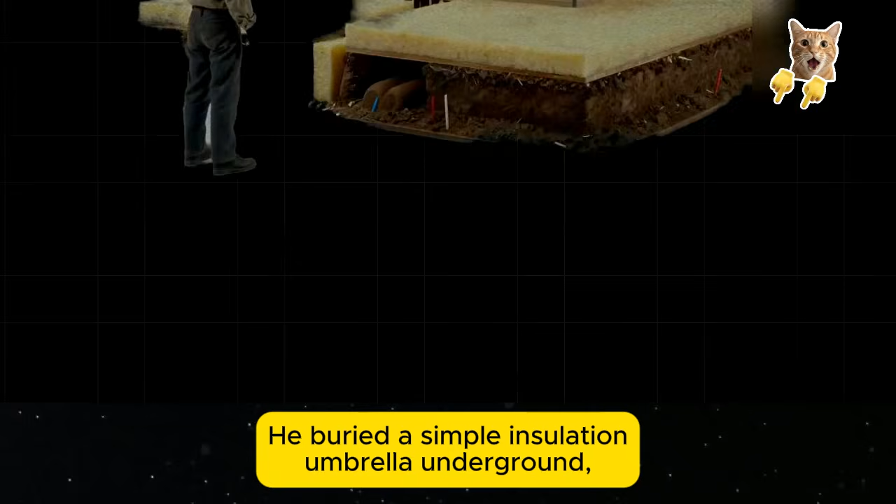In 1985, a physicist in Montana built a home that has not needed a furnace in nearly 40 years. No solar panels, no heat pump, and most importantly, no monthly energy bill. He buried a simple insulation umbrella underground, and the earth itself became his heater. It stored summer warmth and released it all winter long. The heating industry buried it even deeper. By the end of this story, you'll understand exactly how it works.

His name was John Hait, not a contractor, not an architect, but a physicist. He lived in Missoula, Montana, where winter temperatures regularly plunged to minus 30 degrees Celsius. While the rest of the construction world kept building the same insulated boxes and filling them with furnaces, Hait asked a question no one in the heating industry wanted to hear. Why are we burning fuel to heat air inside a structure when the largest thermal battery on the planet is sitting right beneath our feet?

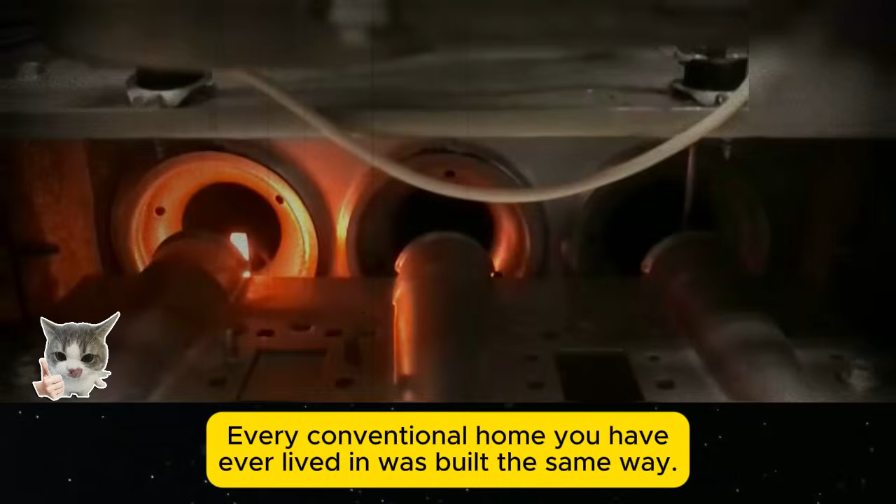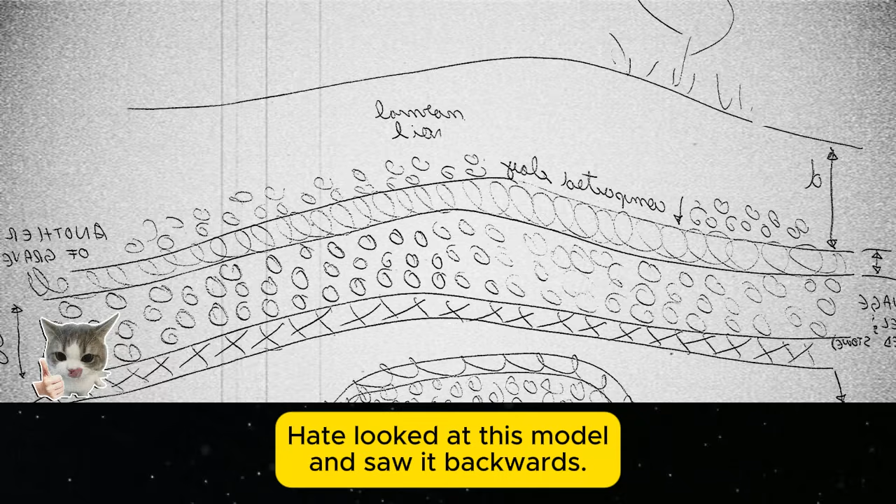Every conventional home you have ever lived in was built the same way. Insulate the walls, insulate the roof, seal the building from the ground, then spend a fortune heating the air trapped inside. Hait looked at this model and saw it backwards. The earth was not the enemy to be sealed out. The surface was the enemy letting stored heat escape. So, he proposed the exact inverse of everything the industry taught. Do not insulate your home from the earth. Insulate the earth from the sky. Let the ground do the work.

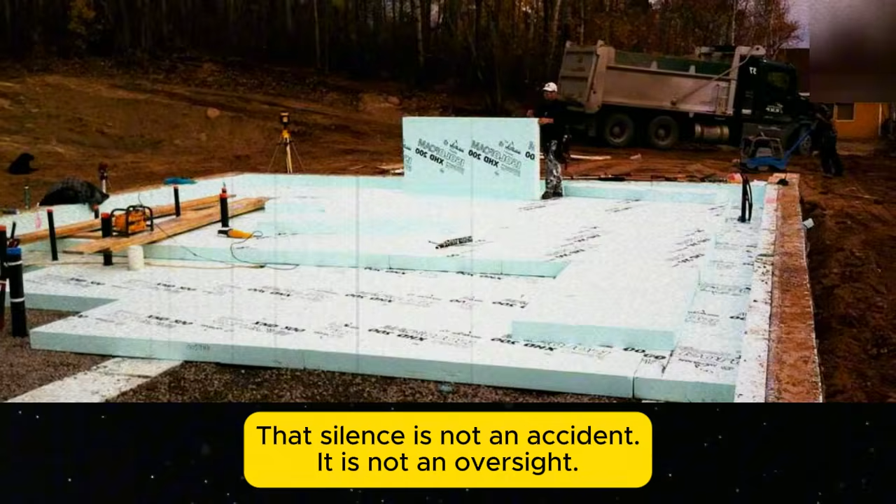In 1983, he published his findings in a book called Passive Annual Heat Storage. The physics have never been debunked, and the book is still in print today. His Montana home is still standing and still heated by nothing but dirt. Yet almost nobody has heard of him. That silence is not an accident. It is not an oversight. And once you understand why, you will never look at your furnace the same way again.

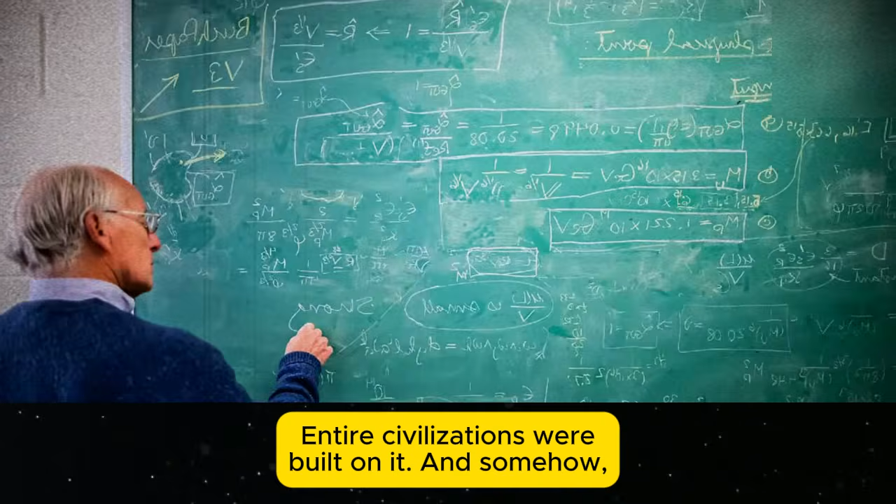But Hait did not invent this from nothing. The principle he quantified is thousands of years old. Entire civilizations were built on it, and somehow the modern world forgot. Travel to Cappadocia in central Turkey. Beneath the dusty surface lies Derinkuyu, an underground city carved from volcanic rock beginning around the 8th century B.C.E. This was not a small shelter. Derinkuyu descends more than 60 meters into the earth. It housed up to 20,000 people. Livestock pens, storage rooms, chapels, ventilation shafts, all carved from stone deep below the surface.

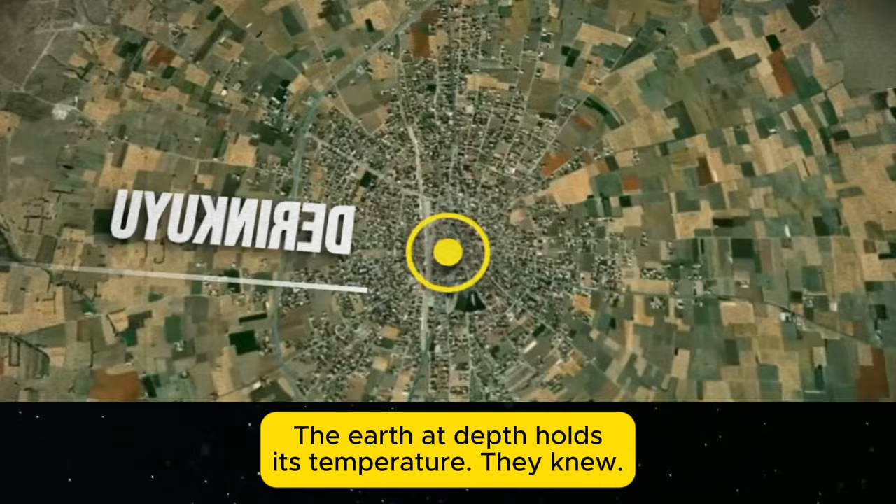The interior temperature held steady between 13 and 15 degrees Celsius year-round. While the ground above baked at 40 degrees Celsius in summer and froze in winter, the people underground lived in stable, comfortable conditions. They had no thermodynamics textbooks. They had something better: generations of observation. The earth at depth holds its temperature, they knew.

Now travel east to ancient Persia around 400 years B.C.E. Engineers there built massive structures called yakhchals with deep underground vaults. These were ice factories in the desert. In a climate where summer temperatures exceeded 40 degrees Celsius, Persian builders manufactured and stored ice, using nothing but the thermal mass of the earth and the cold of winter nights. They charged the ground with cold during winter and harvested it through summer. This was annualized thermal storage operating in reverse, executed flawlessly more than 2,000 years before anyone gave it a scientific name.

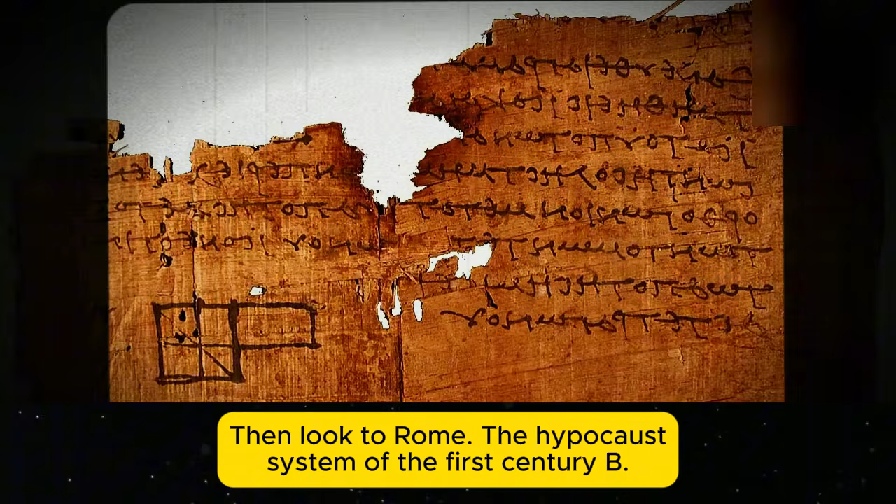Then look to Rome. The hypocaust system of the 1st century B.C. channeled heated air beneath raised stone floors. Roman engineers understood that heating the mass of stone and earth beneath a building produced sustained, even warmth far superior to heating the air above it. They were deliberately charging thermal mass. 3 civilizations, 3 continents, 3 millennia, all converging independently on the same principle. The earth stores energy across seasons. This is not theoretical. It is among the most battle-tested construction principles in human history.

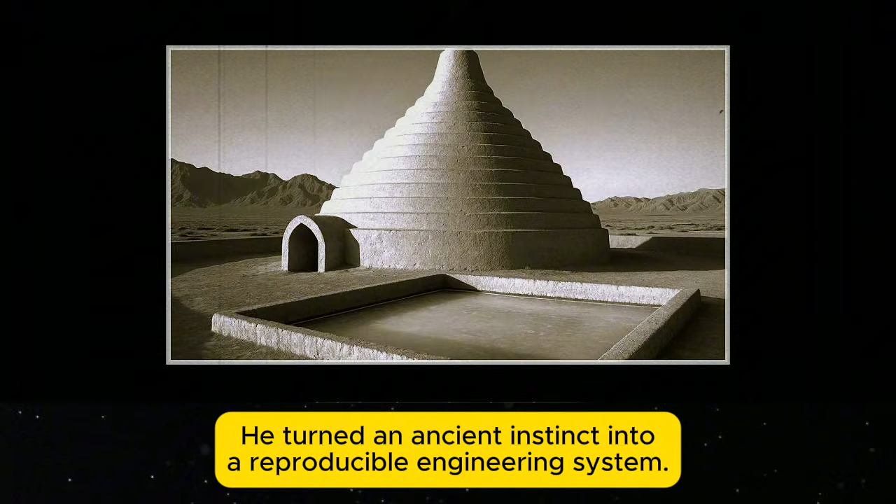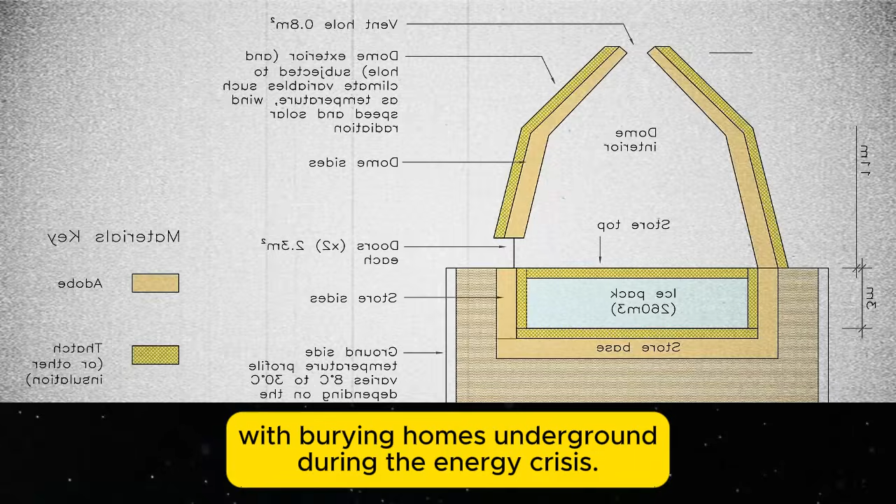So, if ancient builders understood this instinctively, what exactly did John Hait add? He added precision. He turned an ancient instinct into a reproducible engineering system. And what he designed is almost dangerously simple. Here is the problem Hait identified with the earth-sheltered homes of the 1970s. Dozens of architects and builders had experimented with burying homes underground during the energy crisis. Most of them insulated the building shell from the surrounding soil, treating the ground as something to be sealed away.

This was the critical error. By insulating the house from the earth, they cut it off from the very thing that could have heated it for free. The earth was trying to help. The builders were blocking it. Hait flipped the model entirely. His invention is called the Passive Annual Heat Storage Umbrella.

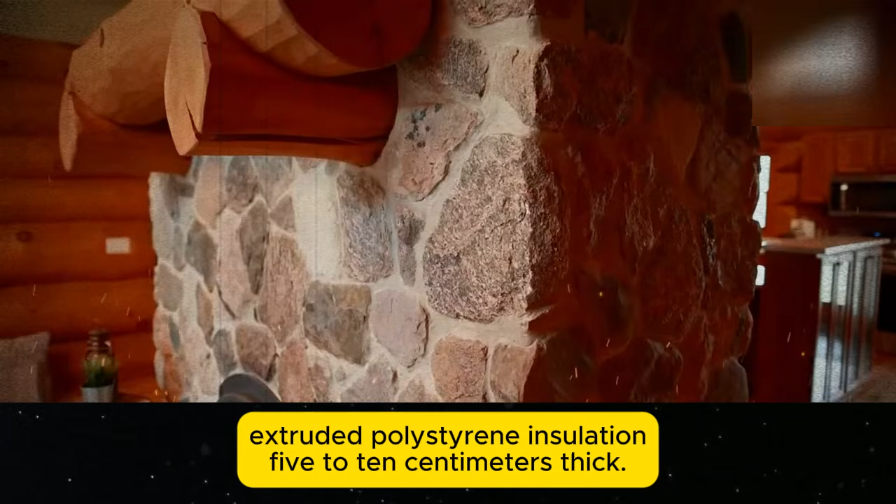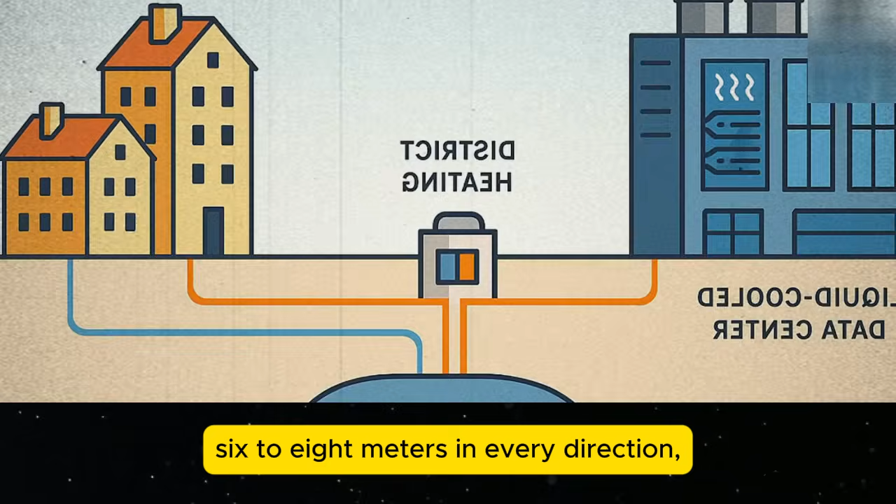Picture a continuous horizontal sheet of rigid, extruded polystyrene insulation, 5 to 10 centimeters thick. This sheet is buried 30 to 45 centimeters below the ground surface. But here is the key. It does not wrap the house. It extends outward from the building foundation, 6 to 8 meters in every direction, like a massive underground parasol.

The umbrella does not insulate the home from the earth. It insulates the earth from the atmosphere. That single inversion is the entire breakthrough. Think about what happens physically beneath that umbrella. It creates a thermally isolated earth mass around and under the home. We are talking about 300 to 500 tons of soil completely cut off from the temperature swings at the surface.

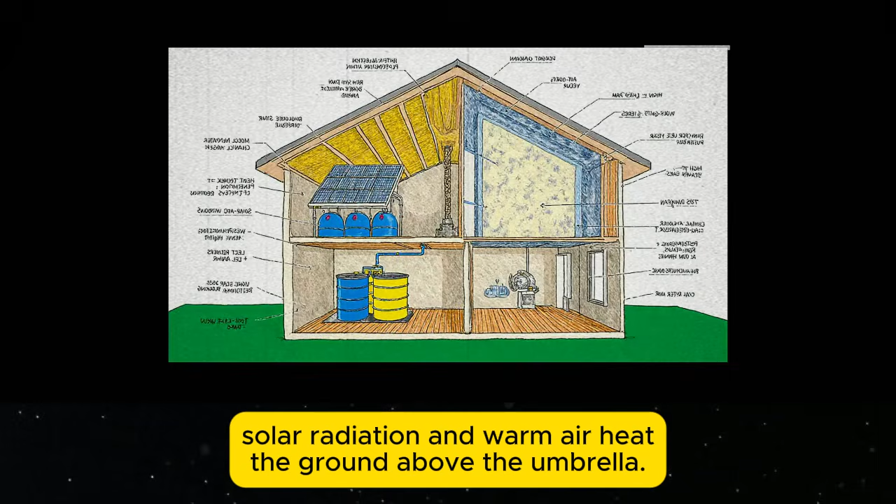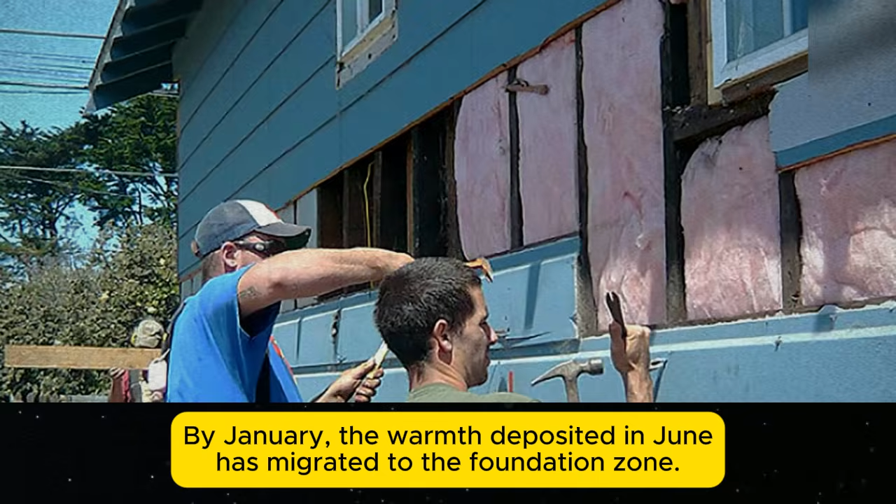During summer, solar radiation and warm air heat the ground above the umbrella. That warmth conducts slowly downward and inward through the soil toward the building foundation. The journey takes weeks, sometimes months. And when winter arrives, the umbrella prevents that stored heat from radiating back up into the freezing sky. By January, the warmth deposited in June has migrated to the foundation zone. The home sits inside a warm cocoon of earth, releasing stored energy through the slab and walls by simple conduction.

The results from Hait's Montana prototype are staggering. Interior temperatures stabilized between 18 and 22 degrees Celsius year-round. No furnace, no boiler, no heat pump running. Outside, Montana winter dropped to -30. Inside, the home held steady at a comfortable 20 degrees. The annual heating cost was zero.

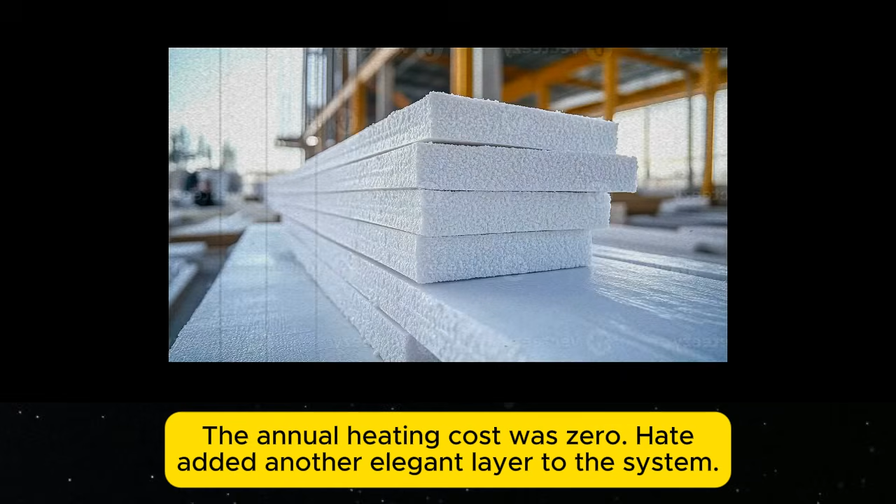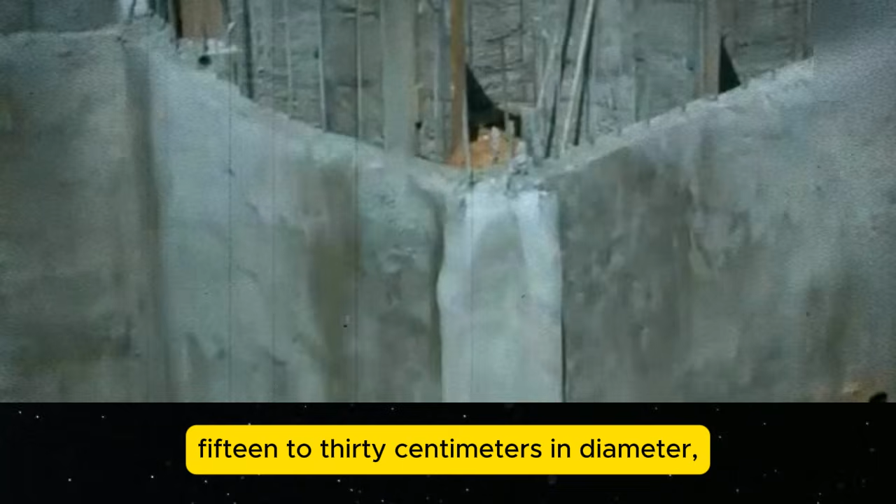Hait added another elegant layer to the system. Buried air intake tubes, made from PVC or corrugated high-density polyethylene, 15 to 30 centimeters in diameter, run 15 to 30 meters underground at a depth of 2 to 3 meters. These earth tubes precondition fresh ventilation air before it enters the home. In winter, outside air entering the tubes at -20 warms to roughly 8 to 12 degrees Celsius just from contact with the stable soil around the pipe.

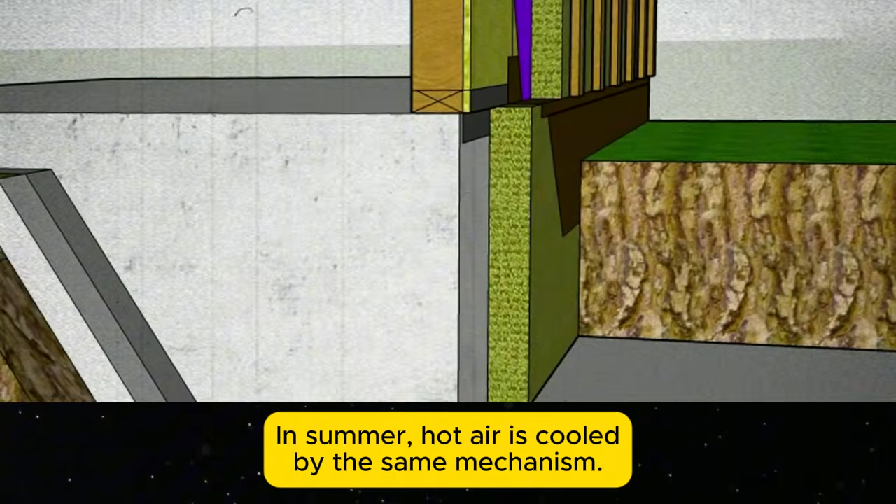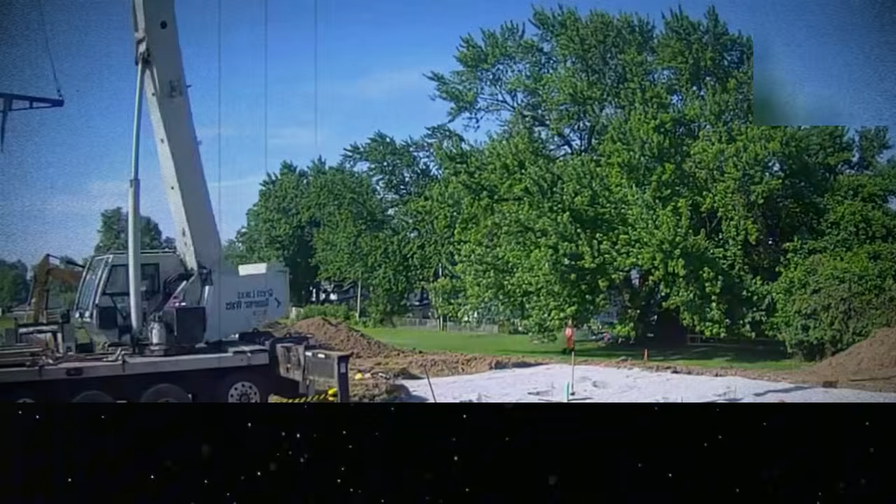In summer, hot air is cooled by the same mechanism. Research documented by the American Society of Heating, Refrigerating, and Air Conditioning Engineers confirms that earth tube systems consistently shift incoming air temperature by 10 to 15 degrees toward the stable soil baseline. No moving parts, no electricity consumed, no maintenance schedule, no replacement cycle. The fuel is sunlight hitting dirt. The mechanism is heat moving through soil. The operational lifespan is essentially geological. The physics are proven. The data is documented.

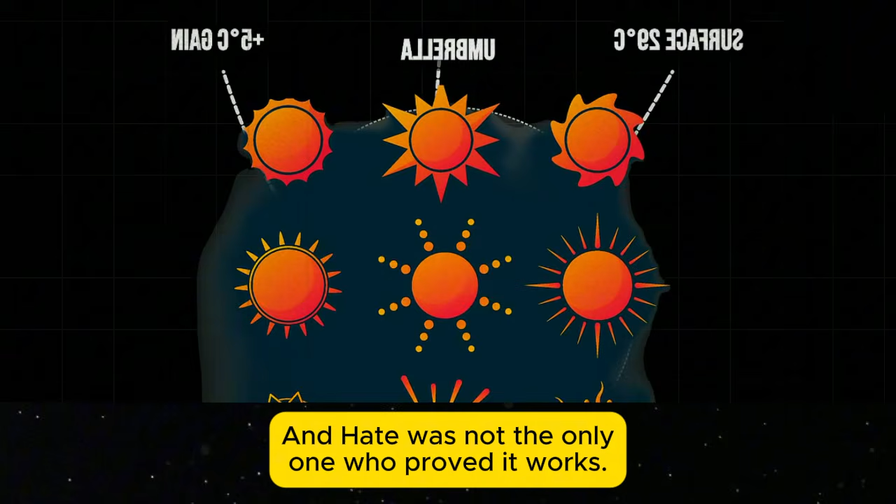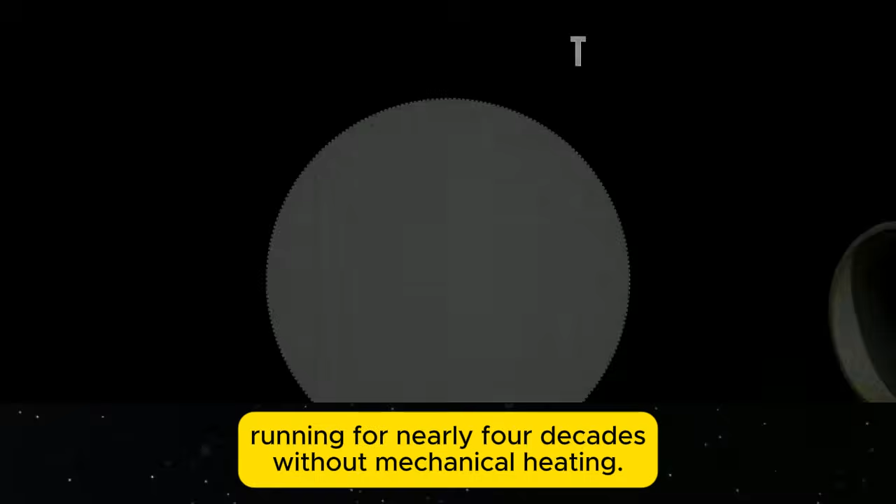And Hait was not the only one who proved it works. Homes built on this system have been quietly operating for decades. The evidence is not thin. It has been deliberately overlooked. John Hait's home in Missoula has been running for nearly 4 decades without mechanical heating. Documented interior temperatures hold stable through Montana winters. This is not a simulation or a projection. It is a continuously occupied proof of concept, quietly proving itself year after year, while the rest of the country writes checks to utility companies.

Other owner-builders followed through the late 80s and 90s. They worked directly from Hait's published methodology, scattering passive annual heat storage homes across states and provinces. The reports that came back were remarkably consistent: dramatically reduced heating bills or no heating bills at all in climates that would crush a conventional home the moment the furnace failed.

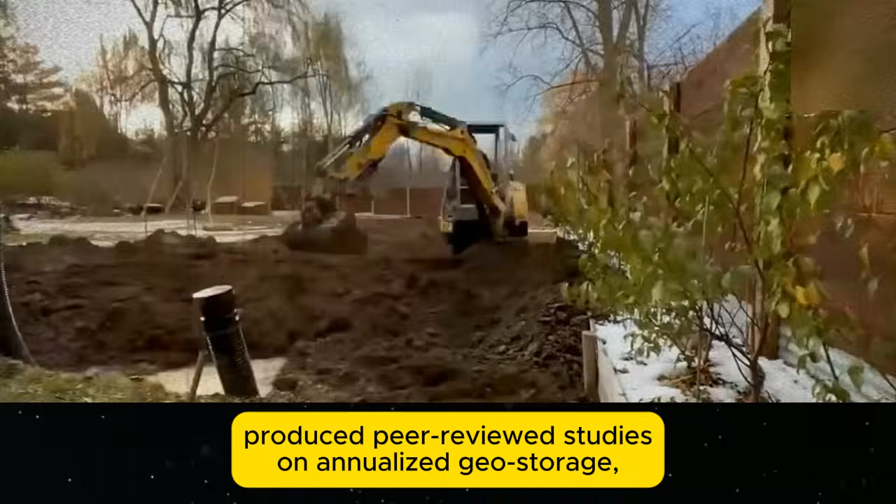The science holds up from multiple directions. Oak Ridge National Laboratory published data showing that soil temperature at 3 to 4 meters deep stays nearly constant year-round, hovering close to the local mean annual air temperature. Researchers at Nottingham and Loughborough universities produced peer-reviewed studies on annualized geostorage, confirming that residential soil masses can feasibly store seasonal thermal energy. No credible institution has contested the underlying physics. They simply do not promote them.

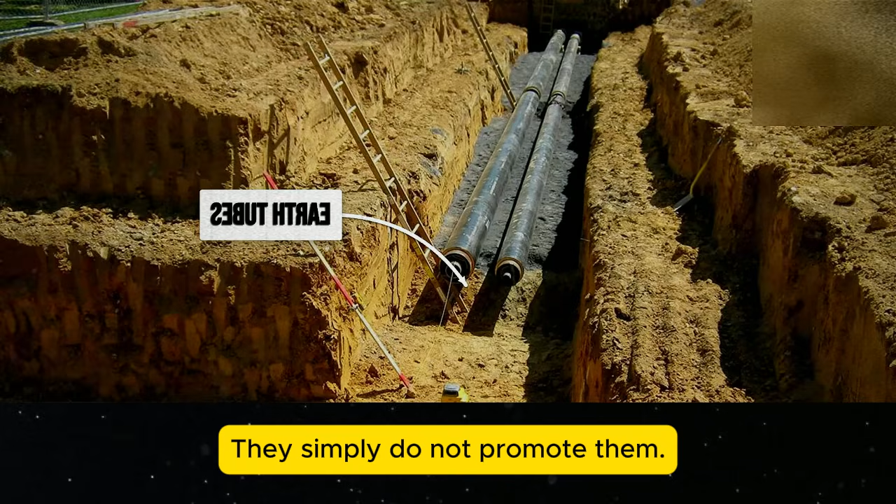The ground source heat pump industry is a multi-billion-dollar global market. These systems extract stored warmth from the earth using compressors, refrigerant loops, and electricity. They require maintenance, replacement parts, and monthly power bills. Passive annual heat storage does the same thing for free with no mechanical components. The heat pump industry has validated the science while quietly monetizing the middleman.

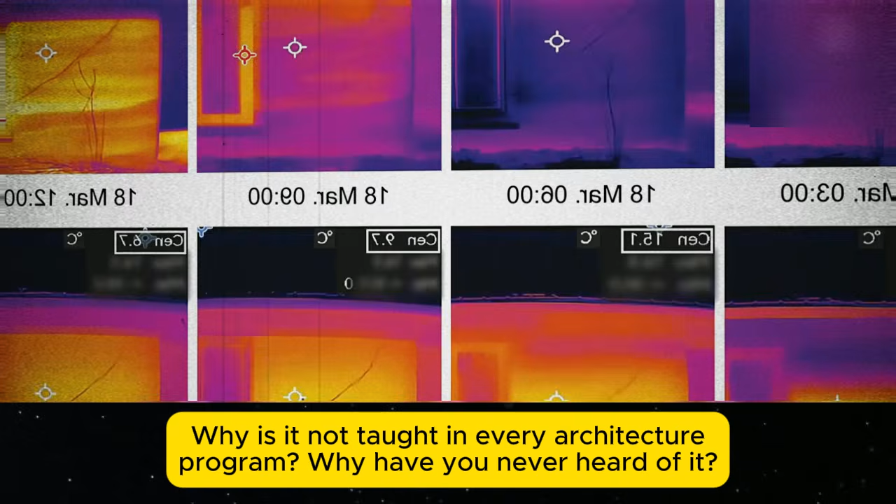So why is this not in every building code? Why is it not taught in every architecture program? Why have you never heard of it? The answer is worth more than the technology itself. Start in 1985. Saudi Arabia opened the taps and flooded global oil markets. Crude collapsed from over $30 a barrel to around $10 a barrel.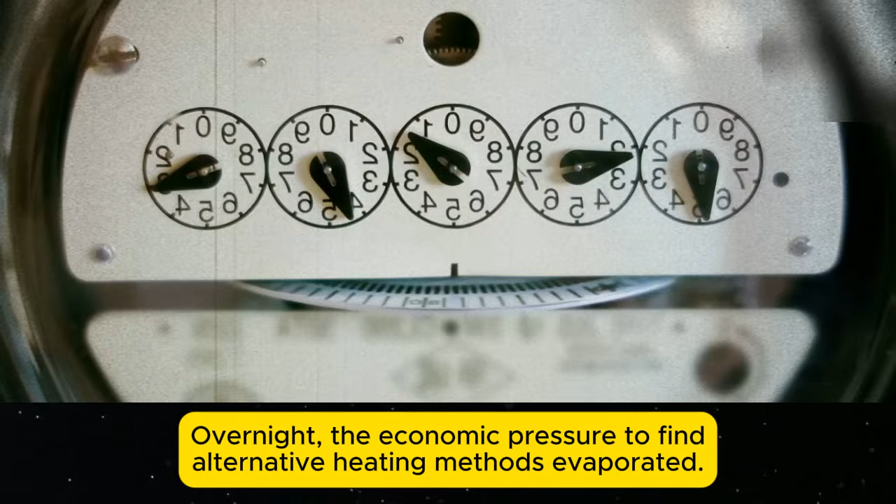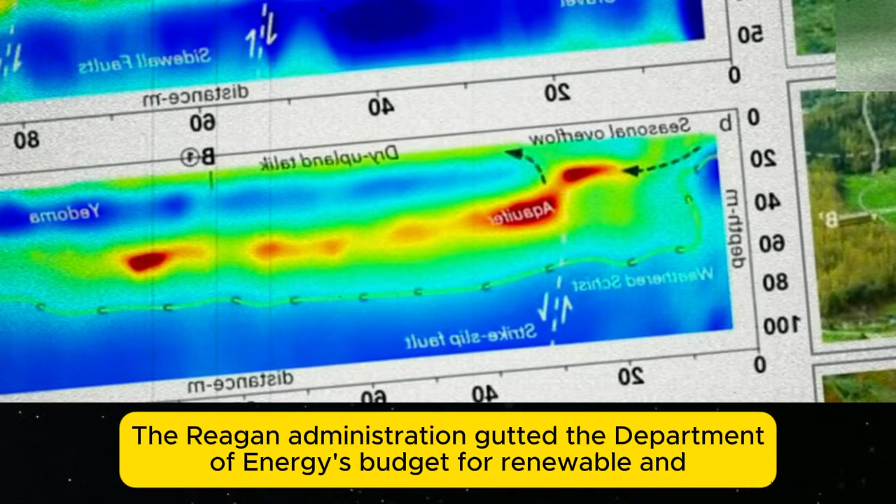Overnight, the economic pressure to find alternative heating methods evaporated. Politicians who had championed energy independence moved on. Federal research dollars followed the price of oil straight down. The Reagan administration gutted the Department of Energy's budget for renewable and efficiency research by approximately 85% between 1980 and 1989. According to Congressional Research Service records, Earth-sheltered housing studies were already a small line item. They were among the first eliminated.

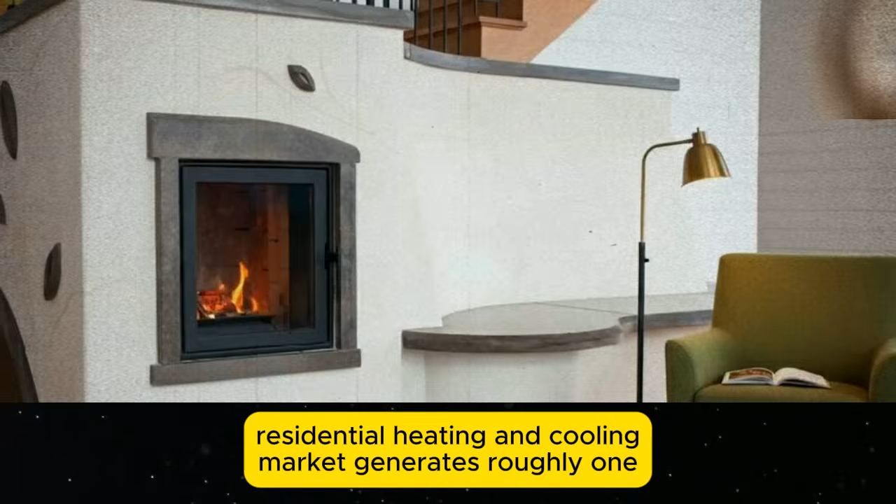The message from Washington was clear: cheap oil is back. Stop looking for alternatives. The industry that profits from your dependence reinforced the silence. The U.S. residential heating and cooling market generates roughly $120 billion every year in furnaces, boilers, heat pumps, ductwork, refrigerant, filters, installation labor, and service contracts. A technology that eliminates the need for all of it is not an innovation to this industry. It is an existential threat.

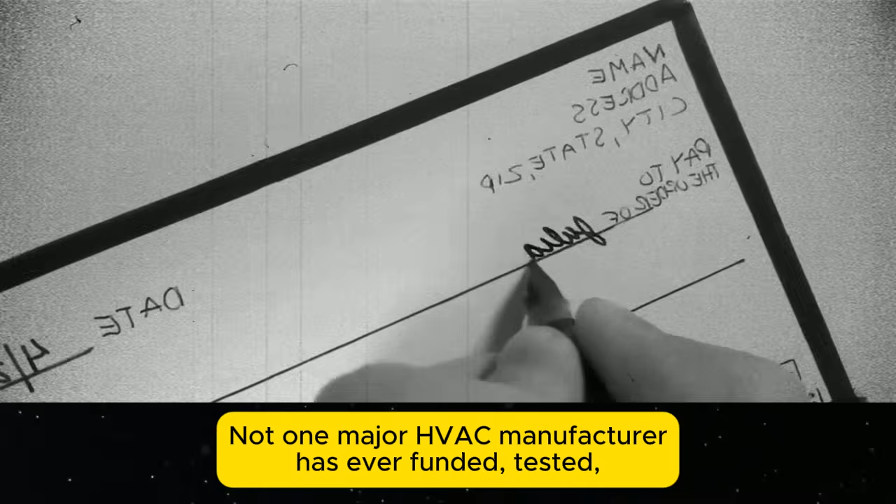Not one major HVAC manufacturer has ever funded, tested, or promoted passive annual heat storage research. That silence is not accidental. It is an economy. But information cannot stay buried forever. Online communities of owner-builders, permaculture designers, and off-grid engineers are sharing Hait's methodology openly across forums and platforms worldwide. His book has found a new generation of readers who are not waiting for permission. They are building energy independence with their own hands.

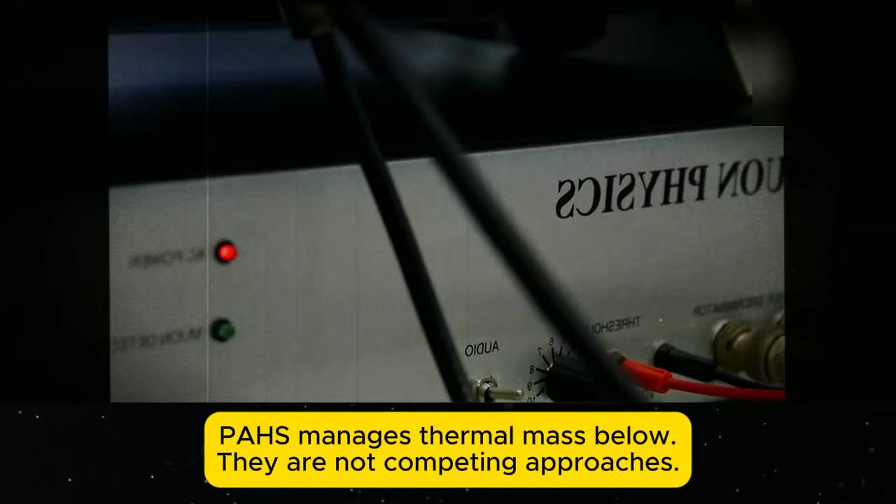Modern building science is converging from another direction. The Passive House standard developed at the Passive House Institute in Darmstadt validates everything he proved decades ago. Preventing heat loss is vastly more efficient than generating heat. Passive House focuses on super insulation and airtightness above ground. PAHS manages thermal mass below. They are not competing approaches, they are complementary halves of the same solution.

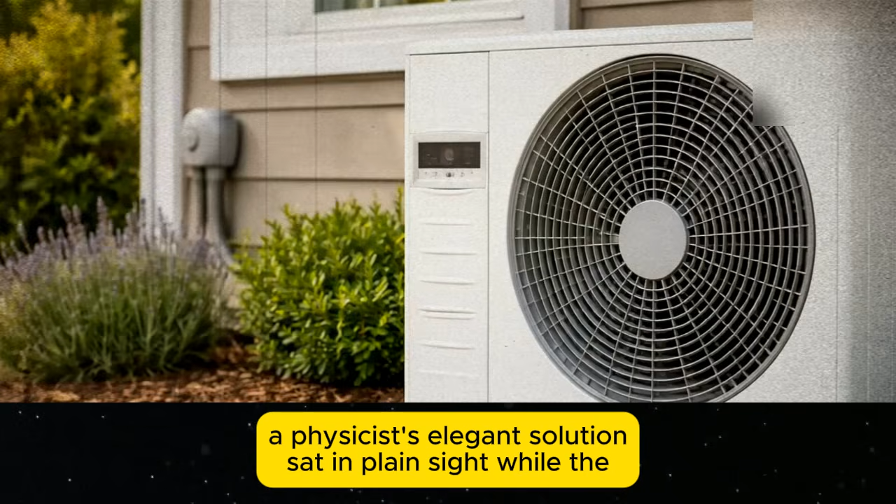A home with a PAHS umbrella beneath and Passive House level airtightness above may represent the most energy-efficient residential construction method on Earth. The umbrella itself is among the cheapest components in any home build. It is simply sheets of rigid foam insulation and the labor to bury them. The barrier was never cost. It was always knowledge. For nearly 40 years, a physicist's elegant solution sat in plain sight while the world kept paying to heat air trapped inside insulated boxes.

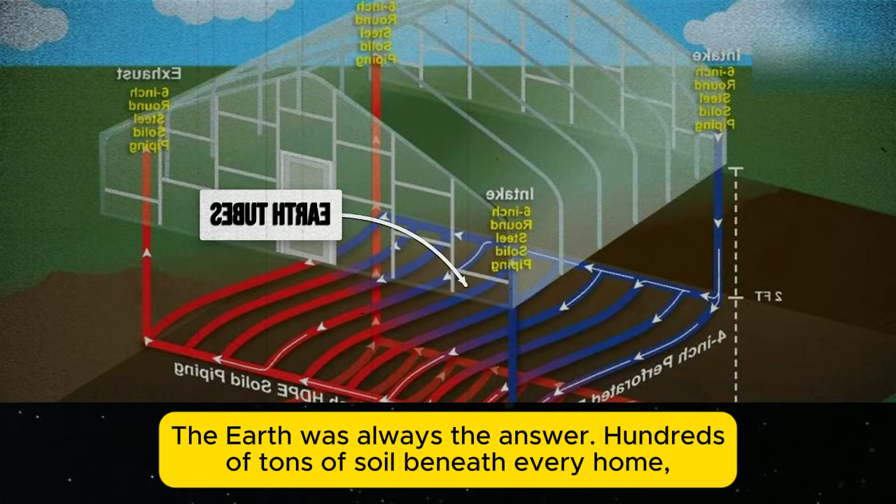The Earth was always the answer. Hundreds of tons of soil beneath every home, absorbing warmth from the sun, holding it across seasons, and releasing it when needed. Free, silent, permanent. The technology was never lost. It was buried right beneath the surface, waiting.

You start with the site. Well-draining soil is essential. A water table at least 4 to 5 meters below your intended foundation is required because saturated soil conducts heat too fast and undermines the whole storage effect. Get a geotechnical survey before you break ground. You need to know what you are working with. Then you dig. Now, let's walk through how you can build it.

You start by excavating the entire building footprint, plus an additional 6 to 8 meters in every direction, creating a broad, shallow basin for both the foundation and the insulation umbrella. Go down approximately 1 to 1.5 meters below your planned finished floor, accounting for drainage, gravel, insulation, and backfill. Grade the exposed soil to slope gently away from the center. Any groundwater that reaches this level needs to drain toward perimeter collection trenches.

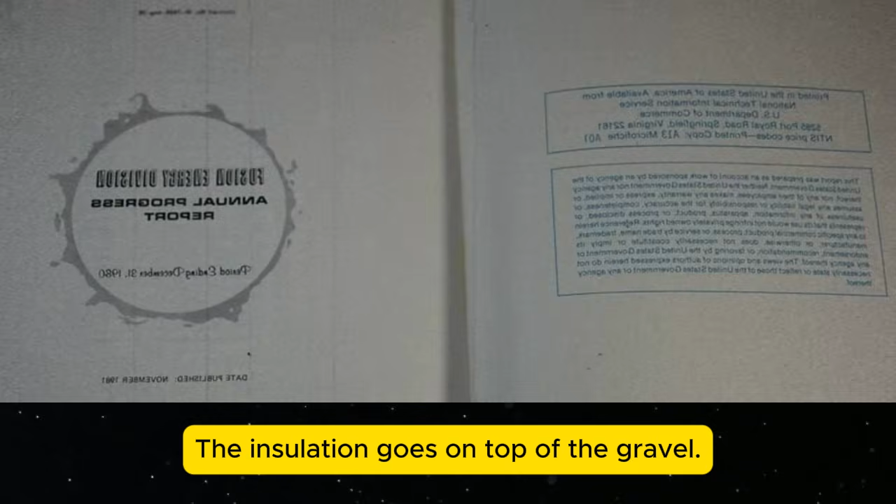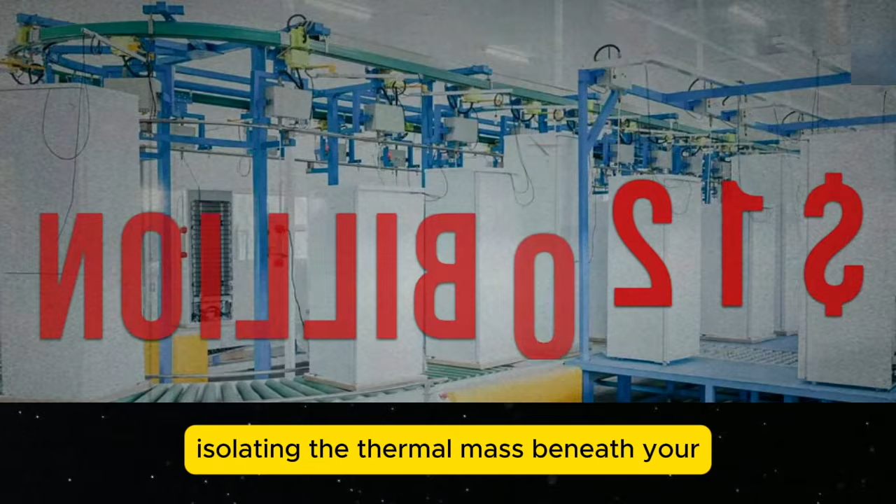Next, lay a 15 to 20 centimeter bed of washed gravel across everything for drainage and a stable base for what comes next. The insulation goes on top of the gravel. Use continuous sheets of rigid extruded polystyrene, 5 to 10 centimeters thick, with joints overlapped by at least 15 centimeters and seams sealed with foam-safe adhesive or tape. No thermal bridging. This layer extends horizontally from your future foundation walls outward for 6 to 8 meters in all directions. That is the umbrella, isolating the thermal mass beneath your home from atmospheric temperature swings above.

Before you pour the foundation, install the earth tubes. Use PVC or corrugated high-density polyethylene, 15 to 30 centimeters in diameter, running through trenches 2 to 3 meters below finished grade. The runs should stretch 15 to 30 meters from an intake point well away from the building to entry points through your foundation walls. Slope them at a minimum 2% grade toward a condensation drainage point because warm, humid air entering cool tubes will shed moisture that has to go somewhere. Cap the outdoor intake with a screened, rain-protected housing positioned to draw clean air.

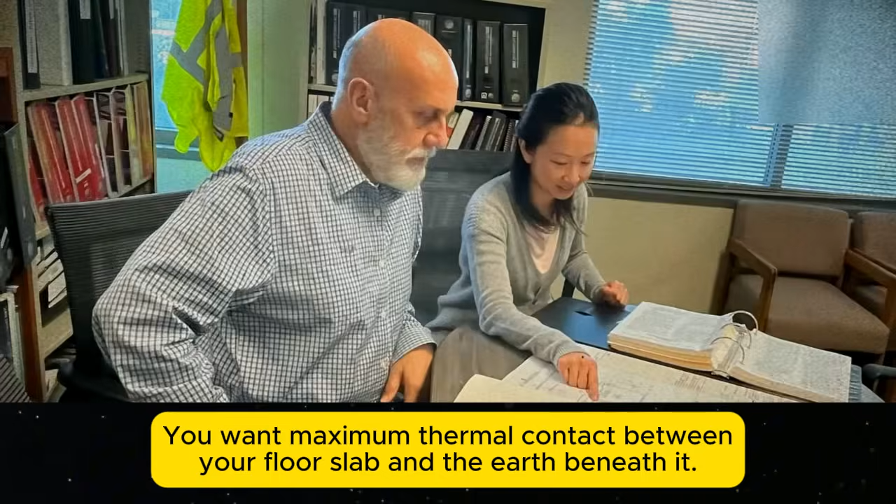Now for the inversion that makes everything work. Pour your foundation directly on the soil mass above the insulation umbrella, deliberately omitting the underfloor insulation that conventional construction requires. You want maximum thermal contact between your floor slab and the earth beneath it.

Stored heat needs to conduct freely into your living space. Use reinforced concrete at least 10 to 15 centimeters thick on a thin sand leveling layer above gravel and soil. Slab edges tie into foundation walls that are also in direct contact with surrounding earth. Perimeter walls extend to the frost line or deeper, but do not insulate interior faces below grade. You are maintaining the thermal bridge between the home and the warm soil mass.

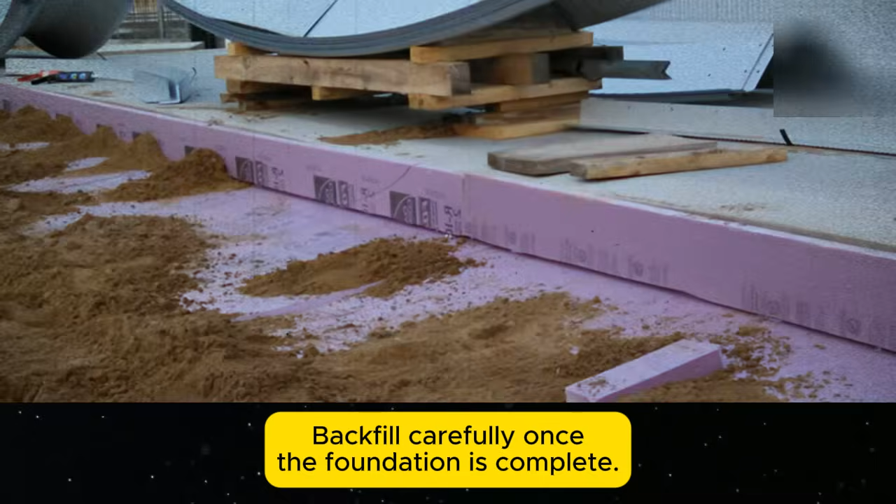Backfill carefully once the foundation is complete. Use original soil or clean fill compacted in 15 to 20 centimeter lifts to prevent settling. Do not damage the umbrella. Verify that it remains continuous and sealed. Final grade slopes away from the foundation for surface drainage while maintaining 30 to 45 centimeters of soil cover over the insulation for protection from ultraviolet light, roots, and surface activity.

Build above grade with high-performance envelope techniques. The PAHS system eliminates most heating loads, but minimizing heat loss through walls and roofs still matters. Use triple glazed windows, continuous exterior insulation, and meticulous air sealing at every penetration and joint. Passive house principles complement below-grade thermal mass perfectly.

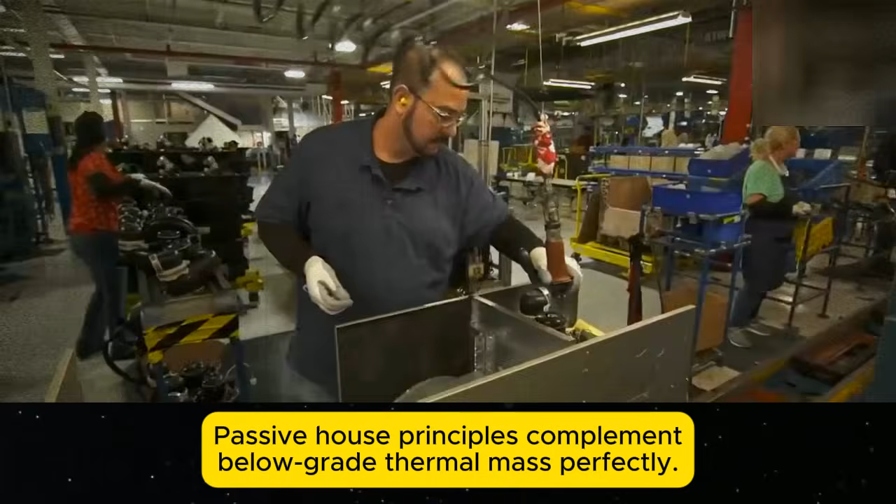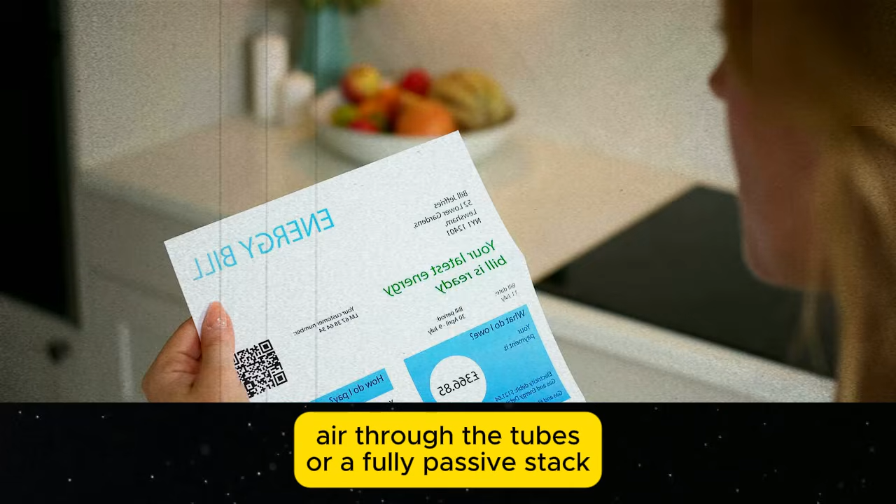Connect earth tube terminations to ventilation distribution that can be as simple as a low-wattage fan, drawing preconditioned air through the tubes, or a fully passive stack effect system, if your design allows sufficient height differential. A new PAHS home needs 1 to 3 full seasonal cycles before the soil mass reaches stable operating temperature. You may need supplemental heat the first winter or two.

Monitor performance with thermometers or data loggers at floor level and at various heights. Watch the thermal wave from summer migrate through the soil and begin moderating your interior. After charging, the system sustains itself with summer solar gain replenishing what winter draws. It is a permanent annual cycle requiring no fuel, no maintenance, and no mechanical intervention. The knowledge exists. Now, you have it too. The Earth is the ultimate silent heat storage solution.

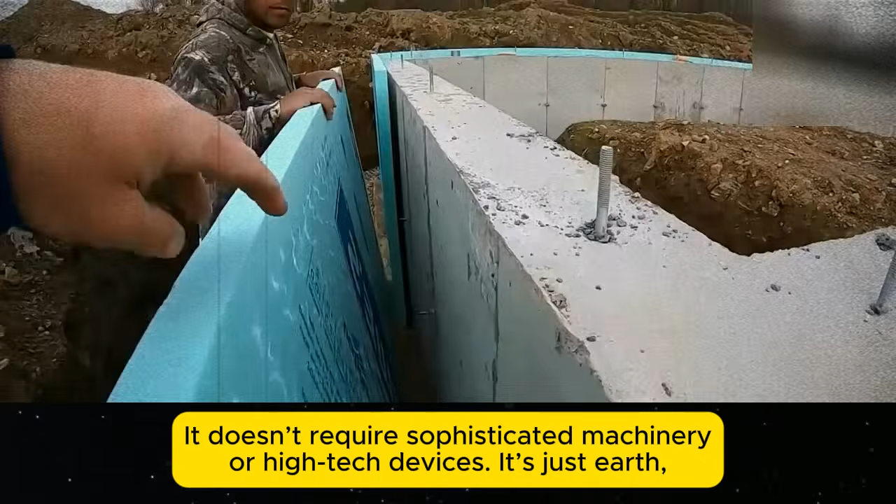Imagine a future where homes are energy independent, drawing power not from grids or costly fuel, but from the ground itself, using nothing but the natural rhythm of the seasons. This isn't a pipe dream. It's a proven, time-tested system that has been silently revolutionizing how we think about heating our homes. The beauty of this system is its simplicity. It doesn't require sophisticated machinery or high-tech devices. It's just earth, insulation, and a well-thought-out design.

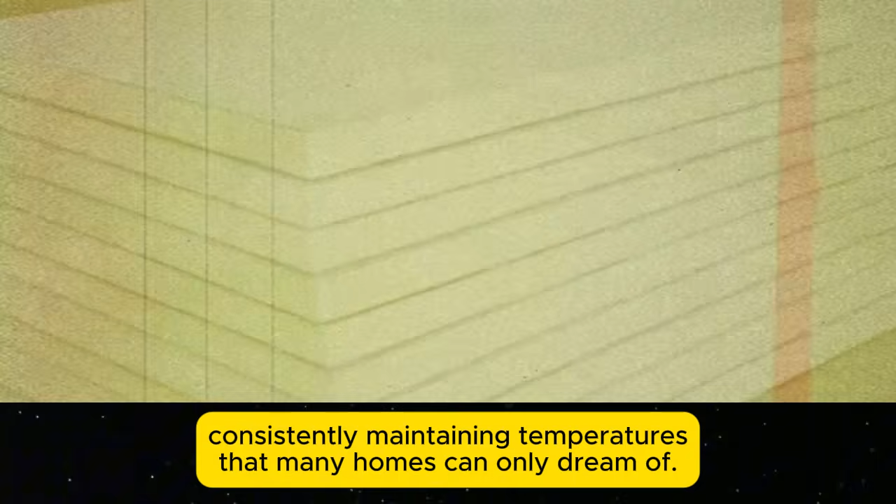The PAHS method has been proven across different climates. Even in the harshest environments, like the freezing winters of Montana, it holds steady. The proof is right there, in Hait's home, standing strong for almost 4 decades, consistently maintaining temperatures that many homes can only dream of. As the world grapples with rising energy costs and environmental concerns, the PAHS method is a beacon of what is possible when we turn to nature for our solutions.

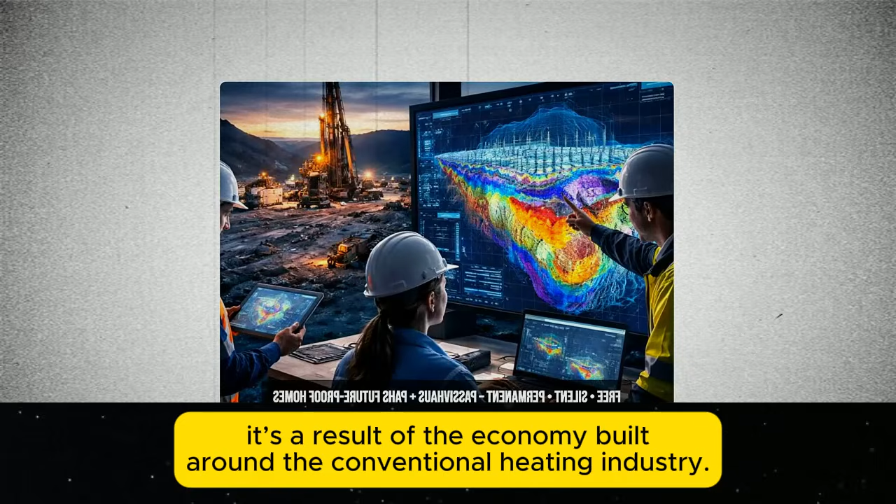It's low-tech, it's low-cost, and it's sustainable. The system is built to last, operating for centuries with little to no intervention. It draws on the natural energy stored beneath the Earth's surface, which has been there since the beginning of time, absorbing warmth in summer and releasing it in winter. The suppression of PAHS is not a conspiracy. It's a result of the economy built around the conventional heating industry. The systems that rely on constant fuel consumption, high energy costs, and maintenance are deeply entrenched in our society.

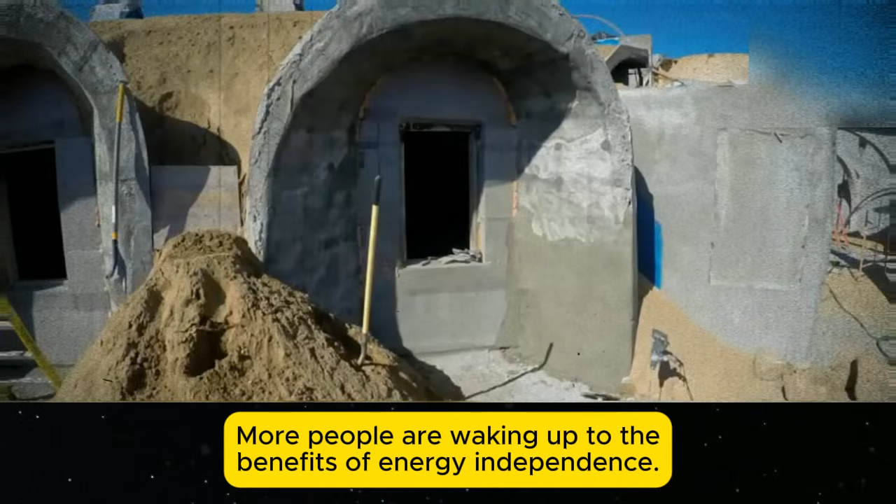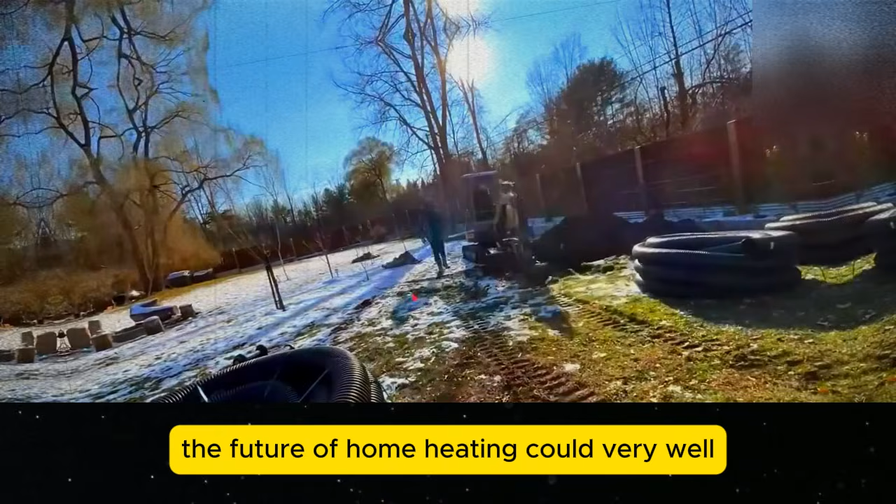But the tide is turning. More people are waking up to the benefits of energy independence. Online communities of permaculture enthusiasts, off-grid engineers, and environmentally conscious builders are sharing knowledge, building homes that don't rely on traditional energy sources. And they're doing it with the knowledge that John Hait shared with the world. The knowledge is spreading, and the systems are being built. As more people begin to realize the potential of this passive system, the future of home heating could very well shift away from dependence on fuels and costly maintenance-heavy systems.

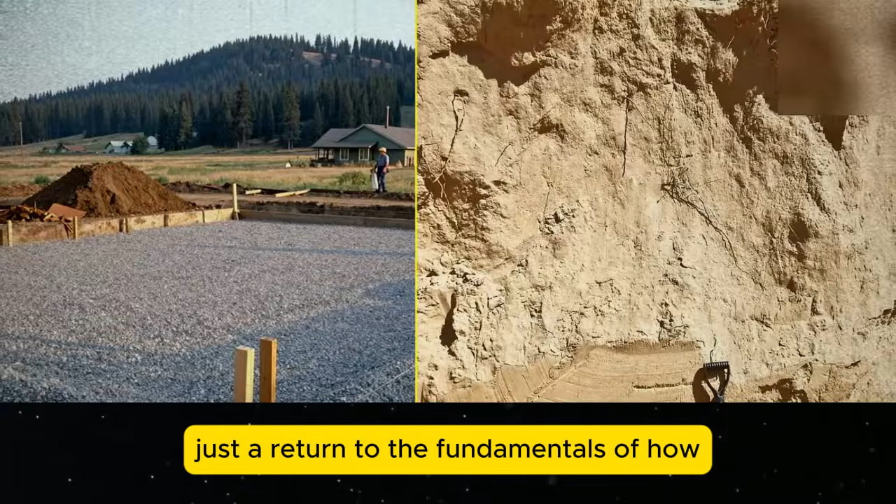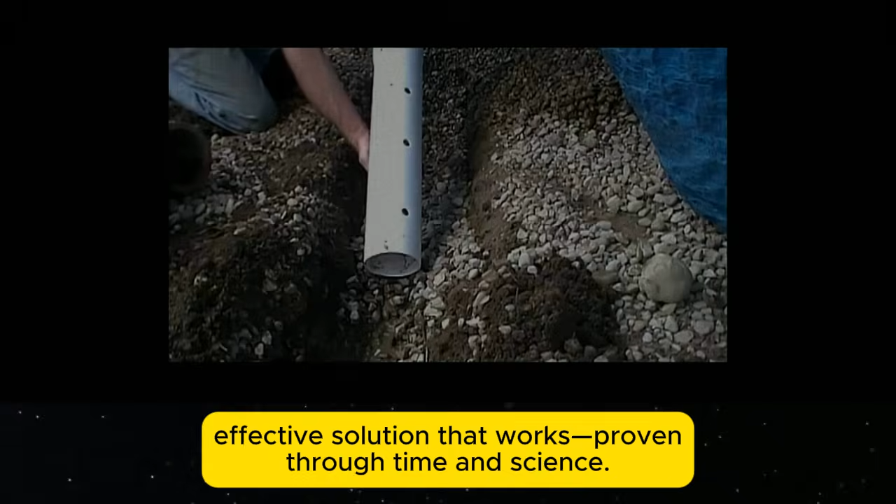This is a silent revolution, one that doesn't require new technology, just a return to the fundamentals of how we build and live in harmony with the Earth. So, if you're ready to take the leap into a more sustainable future, where heating costs are zero and your home becomes a true part of the ecosystem, consider the passive annual heat storage umbrella. It's a simple, effective solution that works, proven through time and science. The Earth has always been the answer, and now, with the right knowledge and approach, you can tap into that endless, renewable energy beneath your feet.

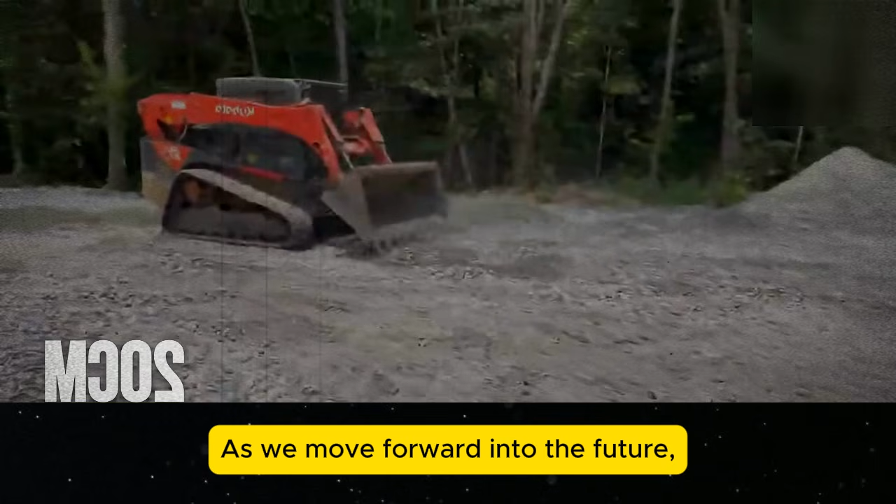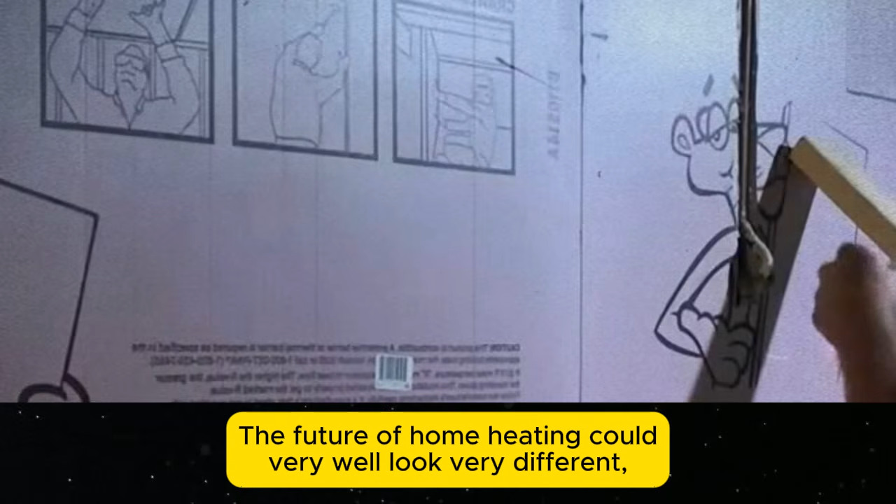As we move forward into the future, the concept of passive annual heat storage, PAHS, may very well represent the next leap in sustainable building practices. People are growing increasingly aware of their energy consumption and the toll traditional heating methods take on both the environment and their wallets. The future of home heating could very well look very different, and it starts with embracing the power that lies beneath us.

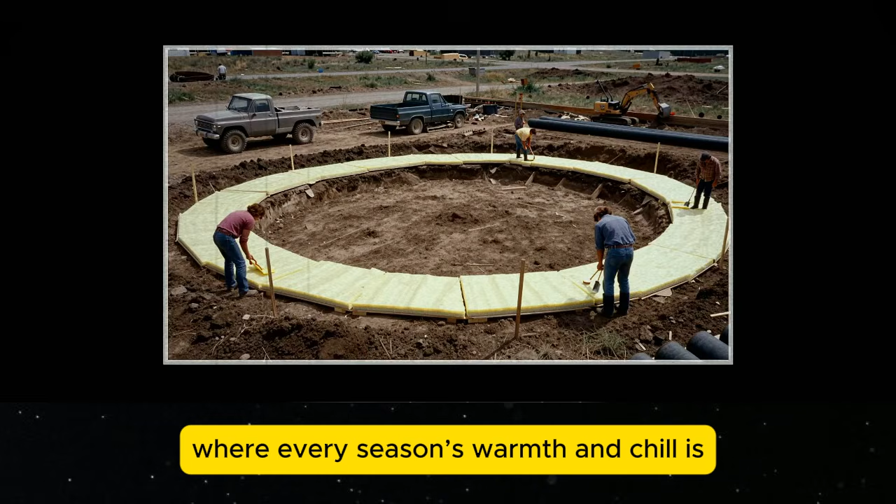Imagine a world where homes across the globe are powered by the Earth itself, where every season's warmth and chill is harnessed and used to maintain comfortable temperatures indoors. The idea that heating costs can be reduced to zero seems like a futuristic dream, but it's already happening. John Hait's innovative design, backed by centuries of human history and science, has shown that it is possible. His work may not be widely recognized, but it has proven its value through decades of consistent performance.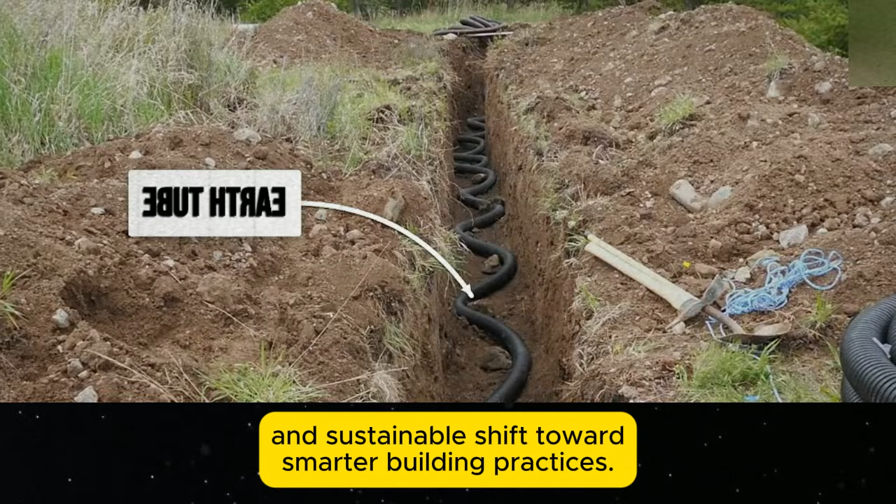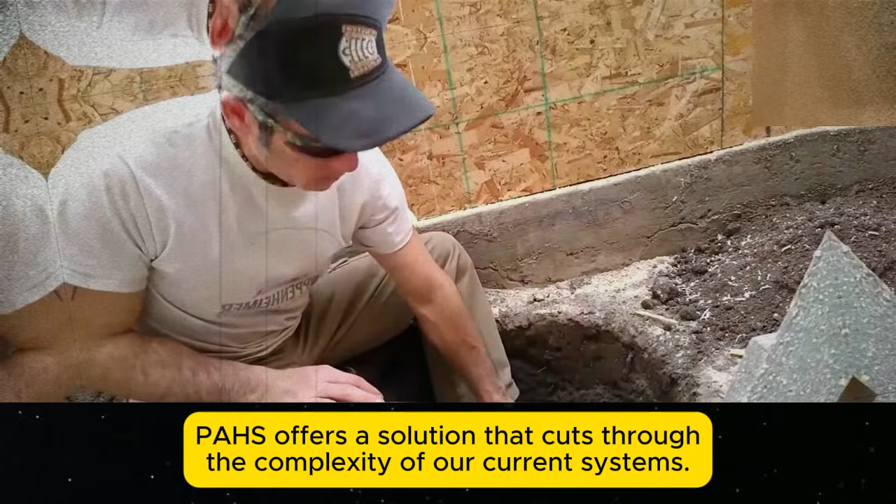This silent revolution is growing, not in a flashy, tech-heavy way, but in a quiet, practical, and sustainable shift towards smarter building practices. In the face of rising energy prices and the environmental impact of traditional heating systems, PAHS offers a solution that cuts through the complexity of our current systems. There's no need for sophisticated machinery, no need for constant fuel consumption, and no reliance on fossil fuels. It's all about working with the Earth's natural energy, capturing the sun's warmth and storing it within the soil. The system operates without electricity, with no moving parts or mechanical intervention, making it incredibly low maintenance and cost-effective.

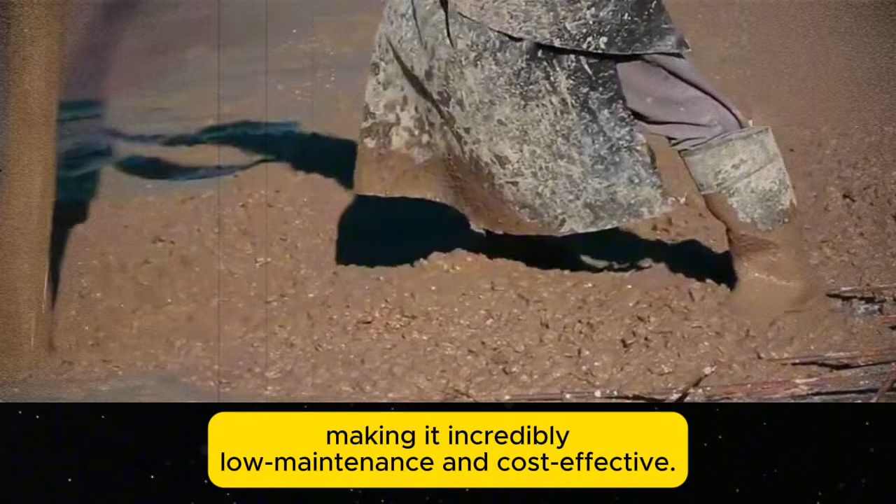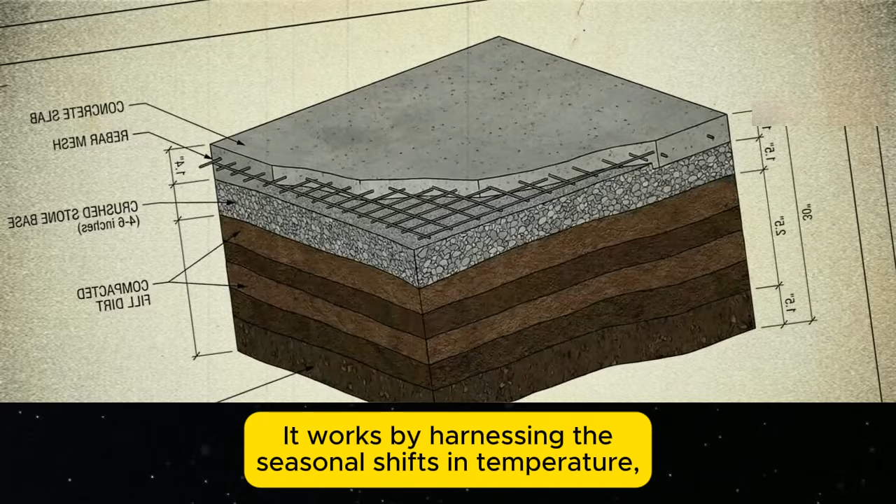What's even more remarkable is that the basic principles of PAHS can be applied anywhere. Whether you're building in a freezing, snow-covered region like Montana or in a sweltering, sun-baked desert, this system can adapt. It works by harnessing the seasonal shifts in temperature, tapping into the Earth's thermal mass to store energy over the warmer months and release it when needed during the colder months. This system doesn't just mitigate heating costs, it transforms the way we think about energy use in homes.

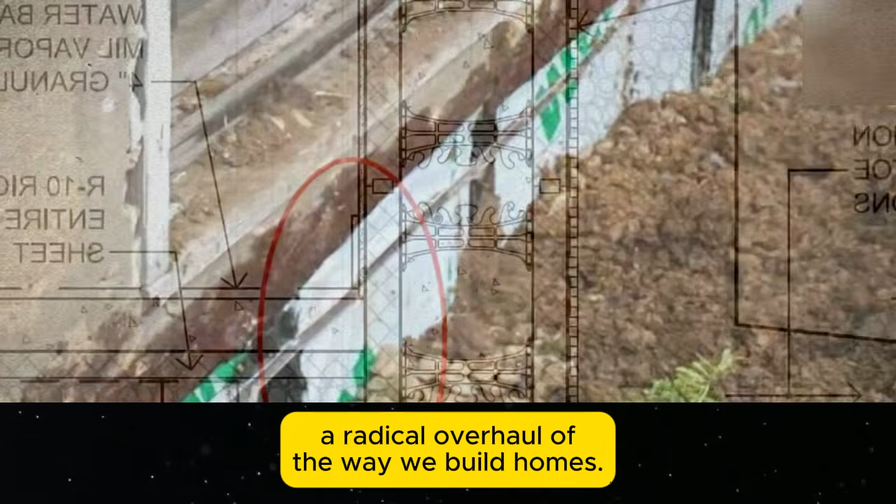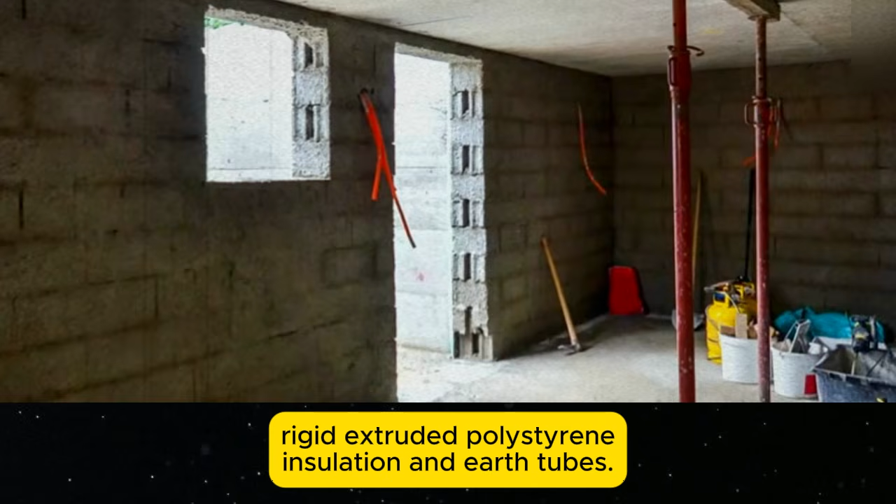Moreover, the beauty of PAHS is that it doesn't require a radical overhaul of the way we build homes. It simply requires a small change in how we approach construction. The system's main components are affordable materials, rigid, extruded polystyrene insulation, and earth tubes. What's truly revolutionary is the mindset shift, from relying on expensive, energy-intensive heating systems to working with natural processes that have existed for millennia. This return to simpler, earth-based technologies could reshape the housing industry, offering an alternative to the energy-guzzling systems we've grown accustomed to.

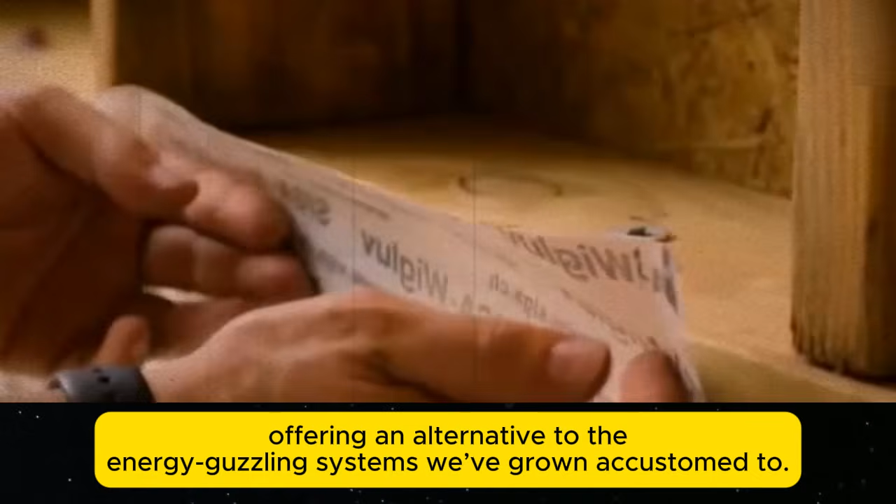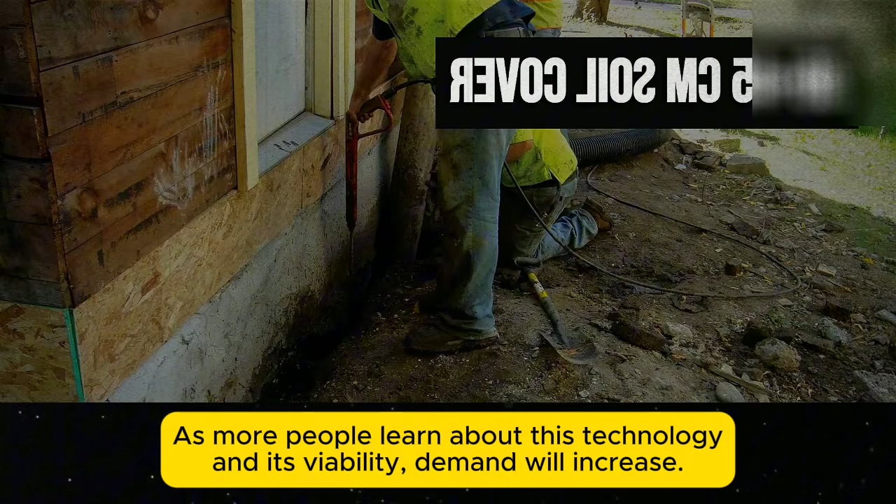And while it may not be mainstream now, the growing awareness and increasing number of people choosing to build using these methods will likely create a ripple effect. As more people learn about this technology and its viability, demand will increase. The system will begin to break through the walls of conventional construction methods. People will see it as the smart choice not only for its environmental benefits, but for its long-term savings.

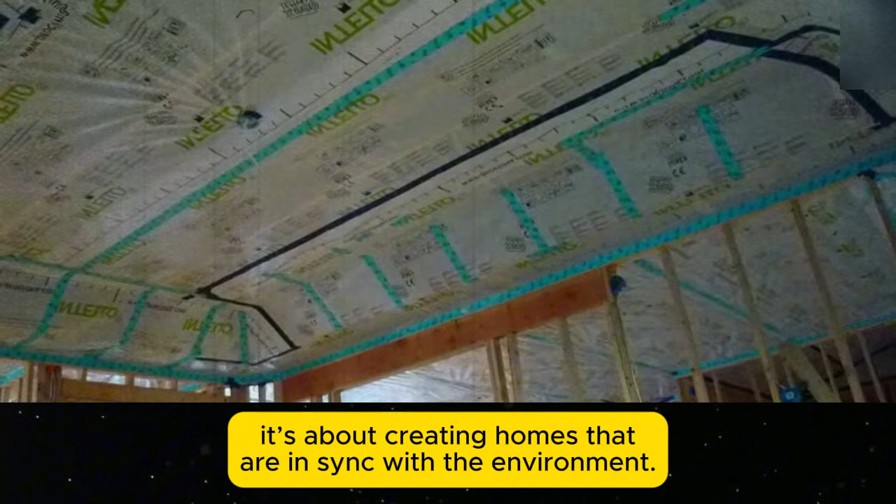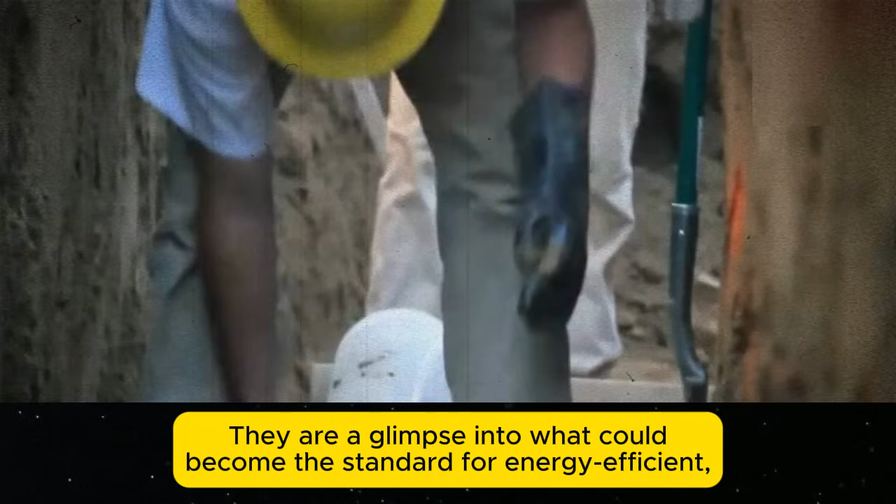The promise of PAHS isn't just about keeping your house warm for free. It's about creating homes that are in sync with the environment. It's about reclaiming our relationship with the Earth and moving away from systems that are wasteful and destructive. PAHS homes don't just provide shelter, they provide a way of living that's more harmonious with nature. They are a glimpse into what could become the standard for energy-efficient, self-sustaining homes in the future. In the end, the true power of this system lies not just in its technical innovation, but in its potential to change how we think about the built environment.

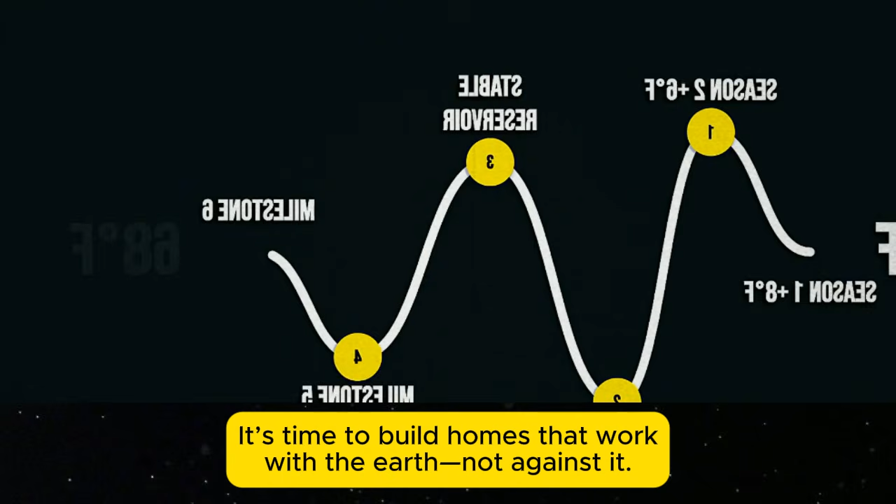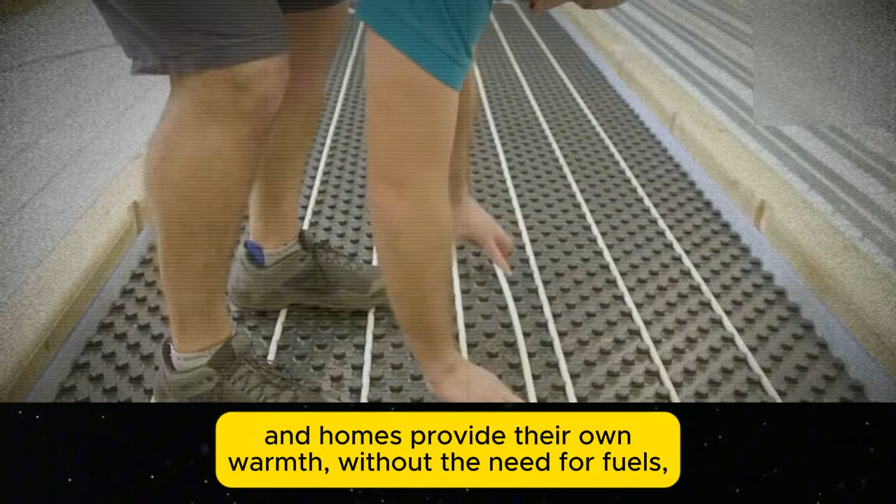John Hait's work is proof that sometimes the best solutions are already right under our feet, waiting for us to recognize them. It's time to build homes that work with the Earth, not against it. As the awareness of PAHS grows, we might just see a future where energy costs are a thing of the past, and homes provide their own warmth, without the need for fuels, electricity, or mechanical systems. The Earth is ready to do the work. It always has been. The question is, are we ready to listen and build smarter, sustainable homes that make energy independence a reality?

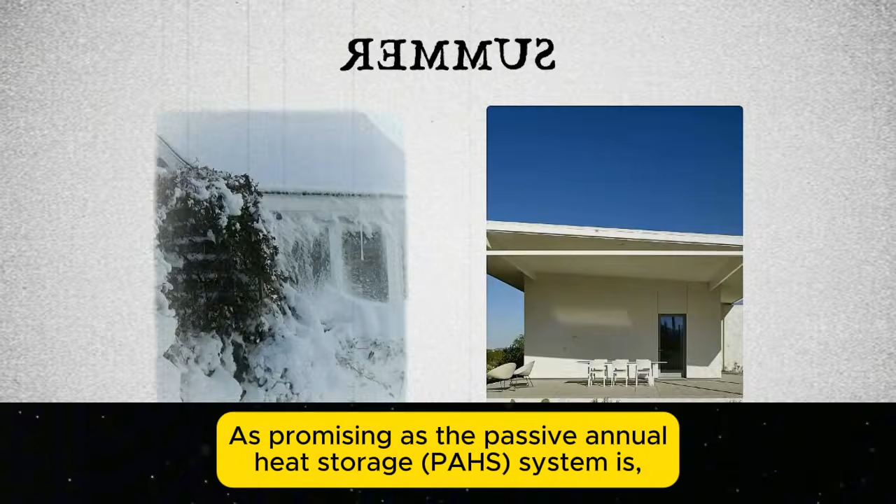As promising as the passive annual heat storage PAHS system is, there are still significant barriers that prevent its widespread adoption. The knowledge exists, but so far, it has not been integrated into mainstream construction practices. The reason for this is not that the technology is flawed or impractical, but rather, it's a matter of systems and structures that have been in place for decades. The construction industry, regulations, and financial